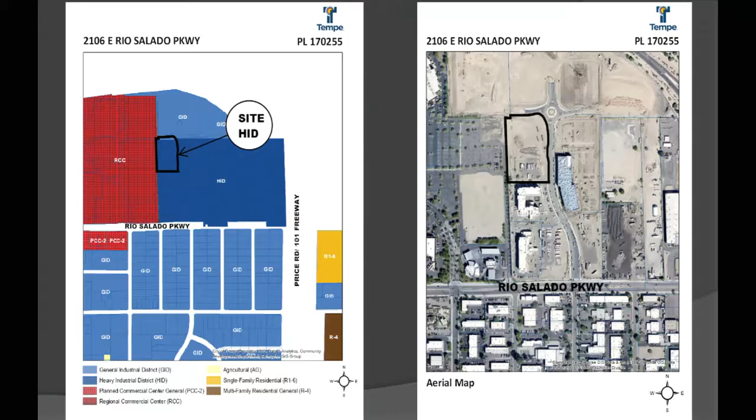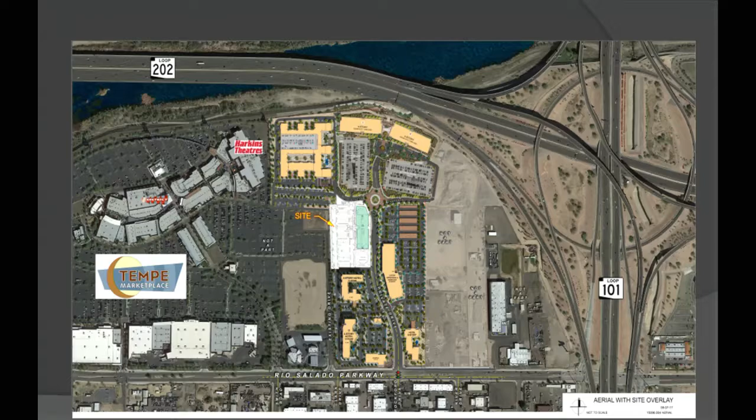They came in previously for the PAD, which established the development standards for the site, and they're before you now for the development plan review for the site plan, landscape plan, and elevations. This phasing plan shows we're on phase 9 of 10, with additional commercial office and a possible hotel or future office. They're not necessarily being done in the order of phasing shown here.

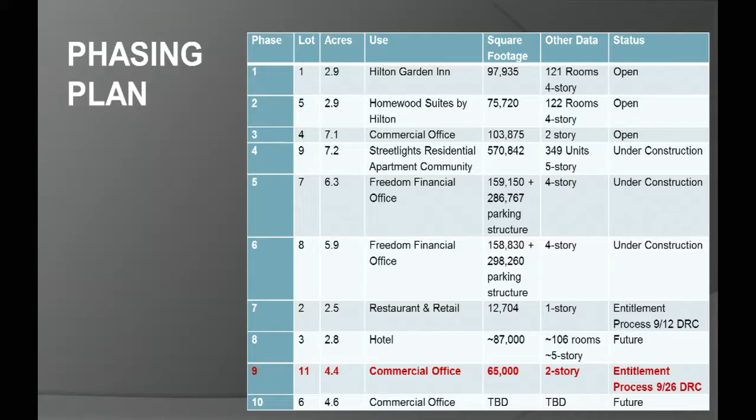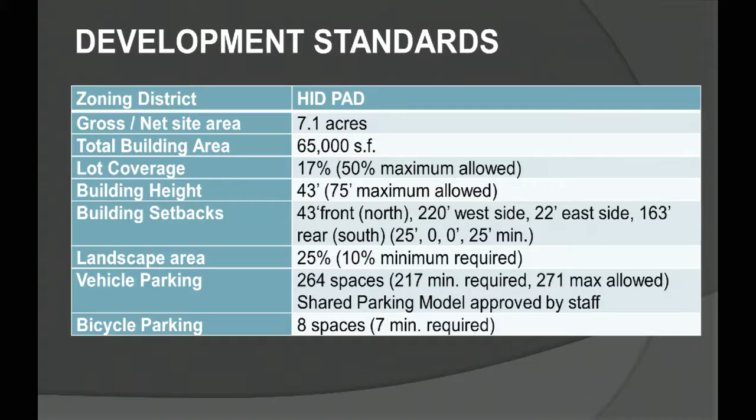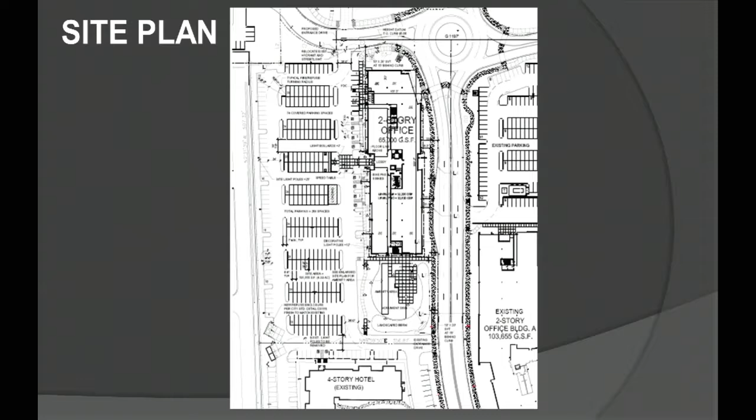These are the development standards they're working within. Their required parking is 217 spaces, so they're slightly over the required parking. It is a surface parked lot. This is the site plan; all of the parking is on the west side of the building. They've provided additional landscaping, and they're doing some covered parking for additional shade for the tenants.

This shows the landscape plan. They have a specific tenant they're working with, and they're doing an amenity area on the south side of the building specific to their tenants' needs—that's the area with the circular pattern and some artificial turf. One of the issues is that because this is on a landfill, they have restrictions on the amount of water-intensive landscaping they can use, so this is a condition where staff is supportive of using artificial turf within the development.

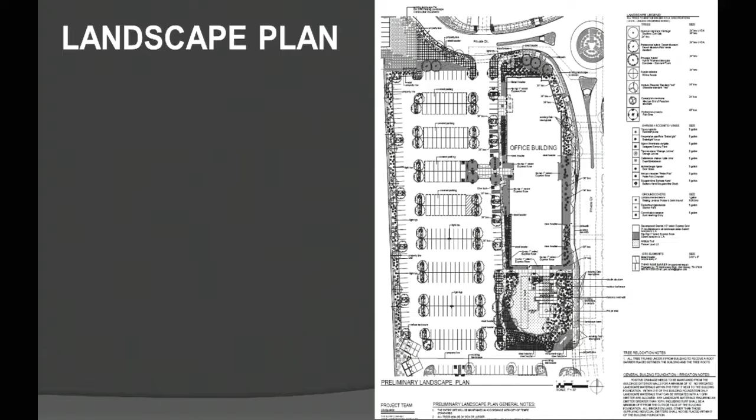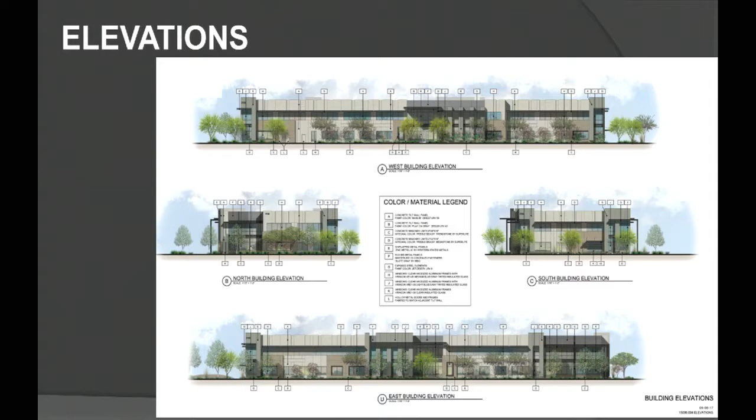It's a two-story office building, and these are the elevations. We've not received any calls of inquiry or concern regarding the project. The applicant has seen the conditions of approval and is in agreement with staff. I'll defer to the applicant to go over the design details with you. Any questions of staff at this time by the Commission? Seeing none, we'll ask the applicant to give a brief presentation.

Thank you, Madam Chair and Commissioners. My name is Todd Lawrence with Butler Design Group. We're the architects for the project, representing Boyer Companies, the developer. Boyer recently completed, within the last year, Building A, directly across the street from this proposed development. Boyer is very excited to have a tenant in line for this, Benchmark Electronics, who are on somewhat of a fast-track schedule to get moved in here and consolidate their offices elsewhere in this city and in Scottsdale.

The building itself is a rather straightforward two-story shell office building. All tenant improvements will be coming at a later date by a different firm. The building is composed of tilt panel concrete construction with a steel frame within, and we have portions of steel and glass along the facades. The palette is primarily based on what was used at Building A across the street, so we have a lot of the same elements, forms, and materials, though we're introducing some new ones to make this building stand out by itself.

The rest of the site, as mentioned, is primarily parking with the amenity area to the south. We'll be utilizing the existing access points that are already established. On the north side, I think we are creating a new one, which will be in line with the Freedom development across the way.

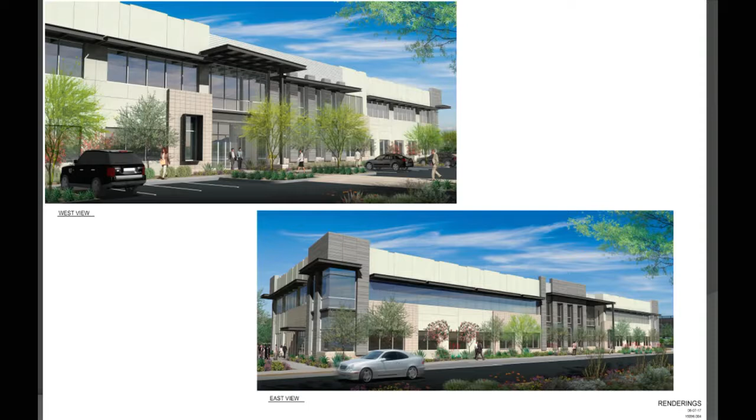Aside from that, the tenant is looking at doing solar car canopies, and the rest of the development is more or less straightforward, meeting with staff, adding landscaping, and trying to increase some of our shading components for the site. Primarily, that's it.

Questions for the applicant? Anyone? Commissioner Brown?

I have just a few general questions. I understand the site was recompacted - this is part of the greater domestic landfill area that had been under remediation for several years. Deep dynamic compaction occurred in these areas, and no further additional compaction is going to occur. They are going to go through the process of scarifying and meeting the geotechnical requirements required by Hogan Associates, who's overseeing all of the development of Tempe, or the Rio 2100.

I have some curiosity issues, but I'll just talk to a soils engineer about how that's typically done. Not having done it myself, I recently attended a seminar on problems with geotechnical work, and I'm sure that with this investment, it's been done properly.

The only other comment I had is that the building plate is pretty wide, so a lot of the interior space is some distance from glass. I just learned that you're not doing the TI, so perhaps there's nothing to be said beyond that, except that it's a challenge.

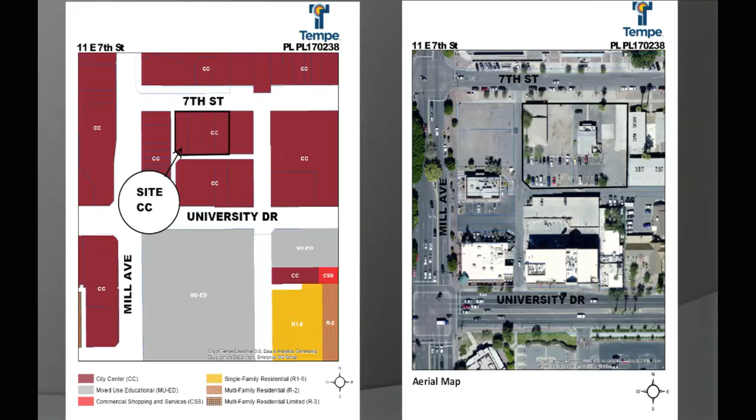They are proposing some modifications to the planned area development standards, including an increase to lot coverage. I need to note that the report said a decrease from 81 to 85%, and a decrease in landscape area on the ground floor, although the original PAD included the upper floors as part of their landscape allotment. We looked at the comparison of just the first floor landscape area.

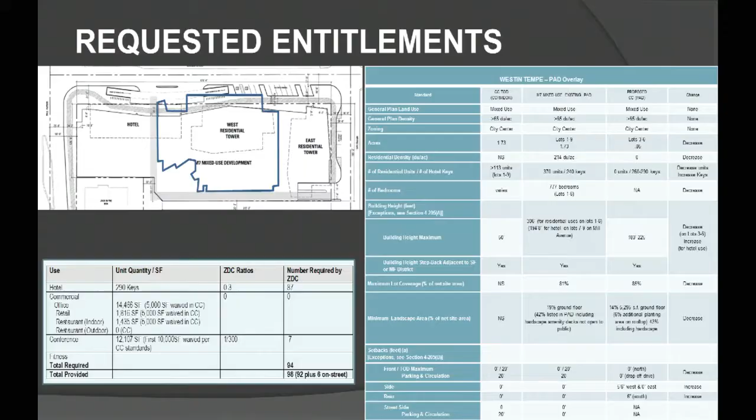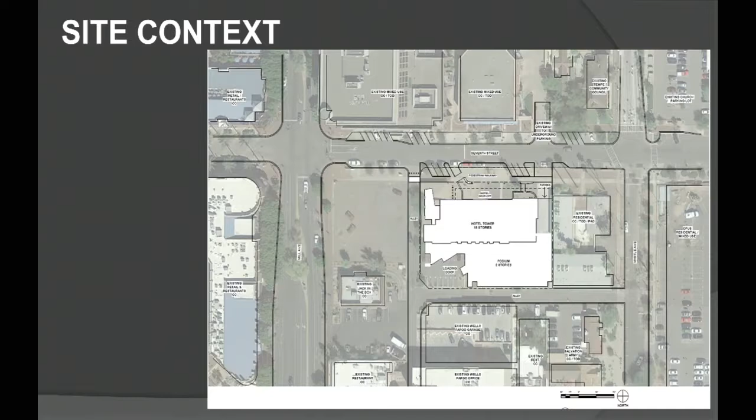This shows you the site context. The hotel has a couple of different layers: the first two floors, and then it steps back to more of a thin tower-like element. You'll see that in some of the site plan or the floor plates.

This is the site plan. All of the service entry comes off of the southwest corner of the property, off of the alleys. They've worked very closely with staff in trying to activate the alleys so they aren't back of house in terms of the aesthetics and the form that they've taken.

All of the entry for guests is off of the north side with additional parking on the street front. The access would be one way in from the western drive, circulating on site to a drop-off lay-by area where they have valet access, and then exiting to go into the garage, which goes below grade.

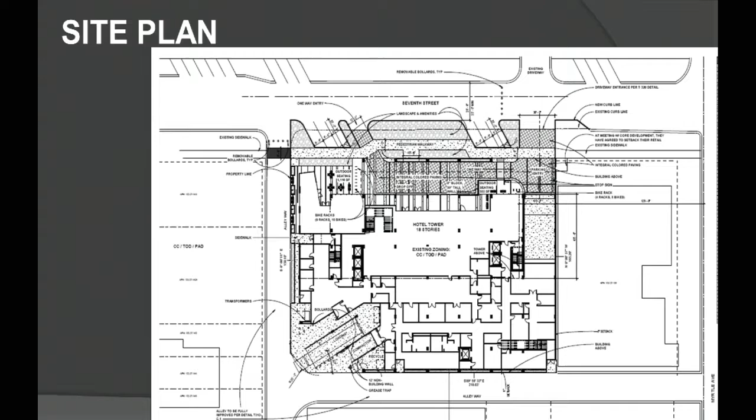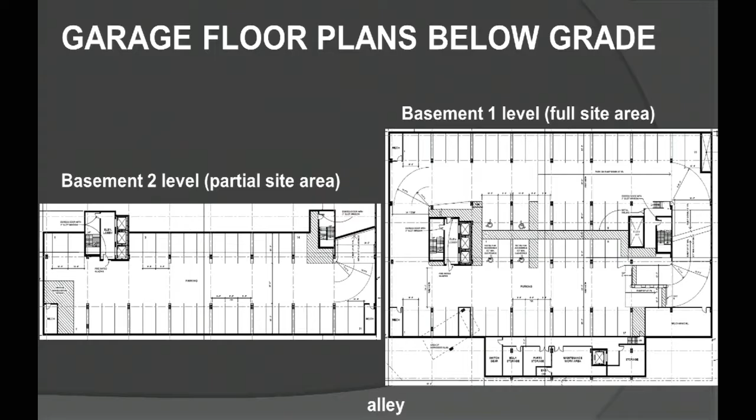The basement level is two floors, subterranean. The lower level is actually a half level that could be expanded if they chose to, but they're meeting the parking requirements for the downtown standards. The first floor is shown there on the right-hand side as the full footprint underneath the building. Here's the first floor again.

I'm not going to go through the programming of each floor—I'll leave that to the applicant—but wanted to show just the relationship of the setbacks. They did push the building back on the west side to enable some additional landscape area on the west, as well as on the south side. It's a 6-foot setback, but the first floor is set back 2 feet to allow planter beds on the first floor that allow some vines to grow up on the south elevation of the building.

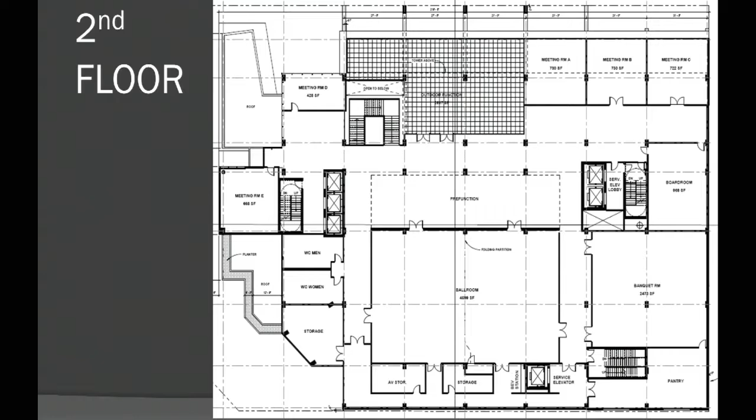They're doing a zero lot line on the east side, and then zero lot line on the north with some arcade fins that extend out over the lay-by area. There's a small rooftop landscape element on the southwestern corner that's viewed from the top, and as you go up the building elevations, you'll see more rooftop expression, and then the building itself becomes a narrow fin to the north orientation of the site.

Floors 4 through 16 are standard rooms, and then the amenity deck is on the 18th floor.

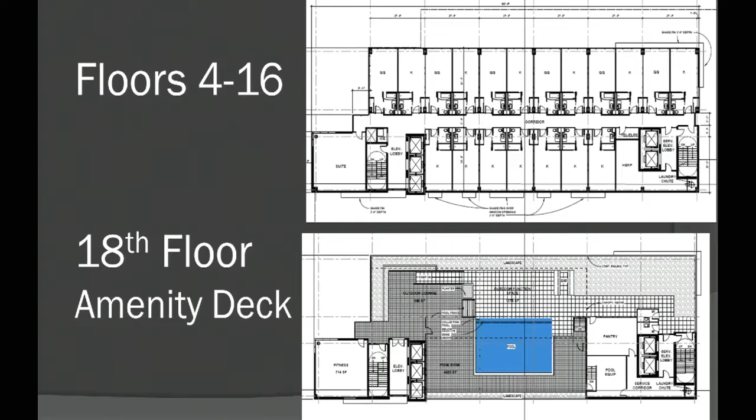The landscape plan is proposing evergreen elm and orchid trees along the street front, and they've got a variety of succulents and vines that would take the heat on the west and south sides to enhance the elevations along the alleys.

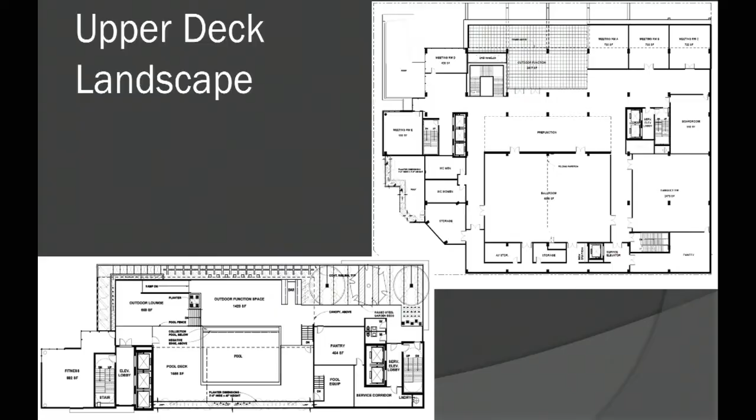These are the upper deck landscape areas, the amenity deck, and the 2nd floor. These are some close-ups of the elevations of the east and west side of the building.

I'll defer to the applicant to present the materials and the design intent.

These are the south and north elevations. The south side has the window configurations aligned with the interior rooms, but you'll notice they're offset, so it's not a standard grid pattern, and it's not a typographical error in the drawings—that is the way they intend them to be. And then they're predominantly doing glazing on the north face.

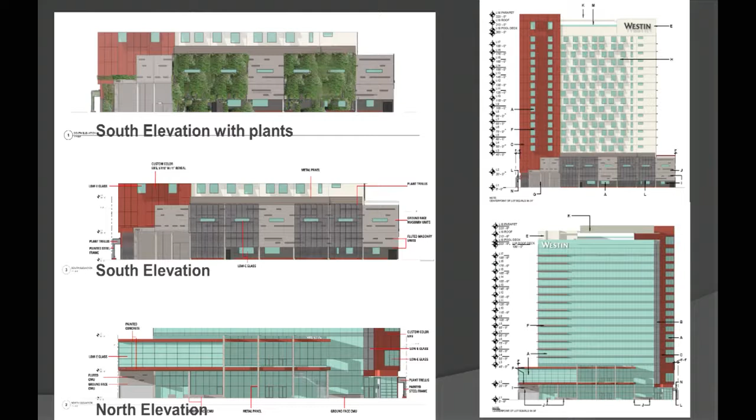Some renderings and 3-dimensional modeling of the site.

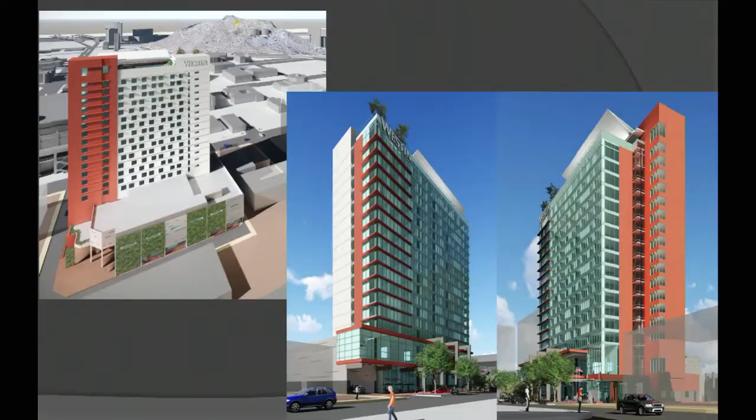I wanted to go over a few conditions of approval that are a little out of the ordinary, and the first one is a proposed change I'd like to read into the record that we discussed at pre-session.

This is in regards to condition 4 for the timing of the demolition permit. This would be changed to read: 'A demolition permit may not be issued for any existing structures on the site until one of the following occurs: 1, a mass excavation permit is issued that includes shoring and excavation of the basement level; or 2, a phased foundation permit is issued; or 3, a complete building permit submittal is accepted by the Community Development Department.'

This has to do with the timing of their phases for construction and the existing structures on site. The other conditions—number 9—is related to the east side driveway configuration as shown on the plan. It contemplates the adjacent property to the east having a setback for their building. Since we don't know if that is going to occur, we wanted to maintain safe egress from this property on site with a sight visibility triangle.

There was a drawing within the report condition that demonstrates how that can be done without affecting the floor plate of their building, providing safe egress to 7th Street from their garage when you're ramping up to a sidewalk condition. So that's what condition 9 is about.

Condition 15 is regarding the materials on the north entry arcade. You'll notice the fins on the lower left side are kind of a copper color. We didn't receive the materials until fairly late in the submittal process, so there was an assumption that this was a metallic finish on the paint for the metal fins. Later they came back and they were presented as more of a beige, nondescript color. So trying to tie in with the character of the downtown and the brick colors and some of the copper colors, staff conditioned that the material on those fins reflect what you see in the image to the left, that it be a copper, not necessarily a copper metal, but a paint that has a reflectivity in it with like a mica pigment.

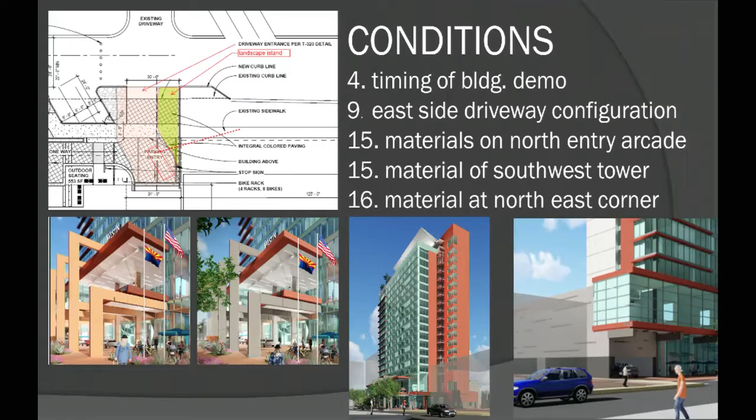Thank you. I want to understand the fins—that is a metal product, but it's being painted a flat paint? Well, yeah, I've got the sample boards here.

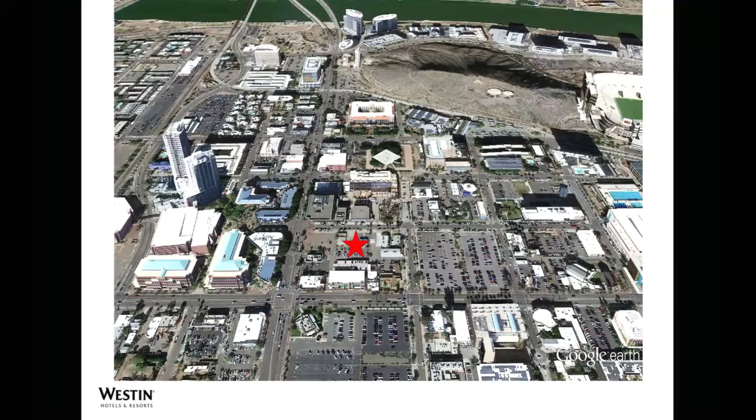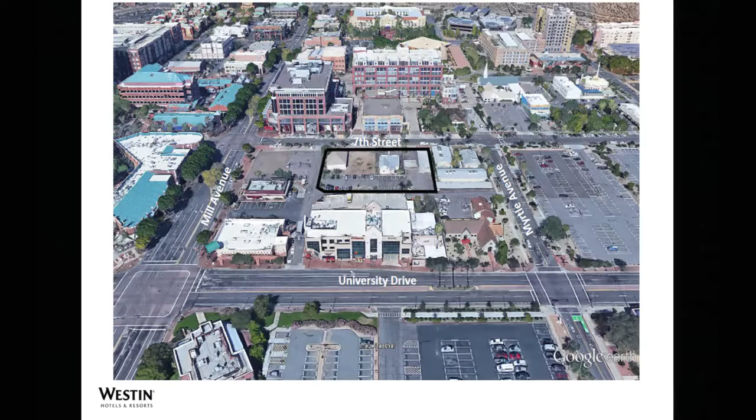A little more close-up context there. This is, in case you're wondering, a site with a basketball court on it—there's a large temporary basketball court there.

Diana does such a great job presenting the basics and main part of the project, so I'll go through quickly. The site is zoned CCPAD, has been that way for quite a while. I think the M7 project was zoned CC.

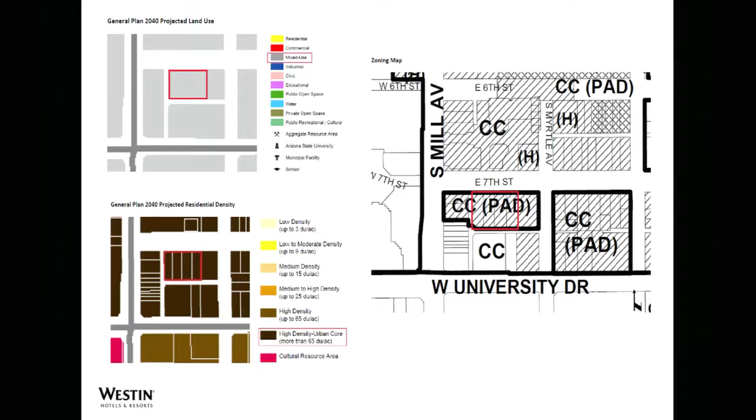It's a mixed-use general plan with high-density urban core density on the property. It's within the urban center concept study for downtown building heights, which allows 300 feet—we're not going anywhere near that. The original approvals for M7 were, I think, 307 feet. Our building's top tip is at 224, and that's not even the deck—those are roof structures, shade structures on the roof. So the actual building height is significantly less than that.

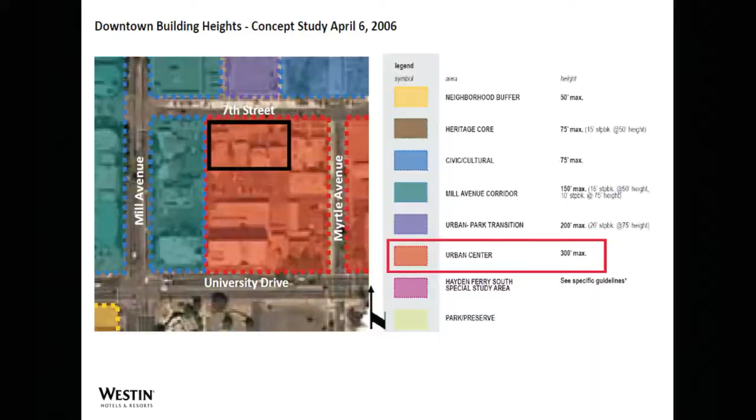I'll let the majority of this presentation be by the person who knows the most, the architect from RSP, Joe Ellis. Hi, I'm Joe Ellis with RSP Architects.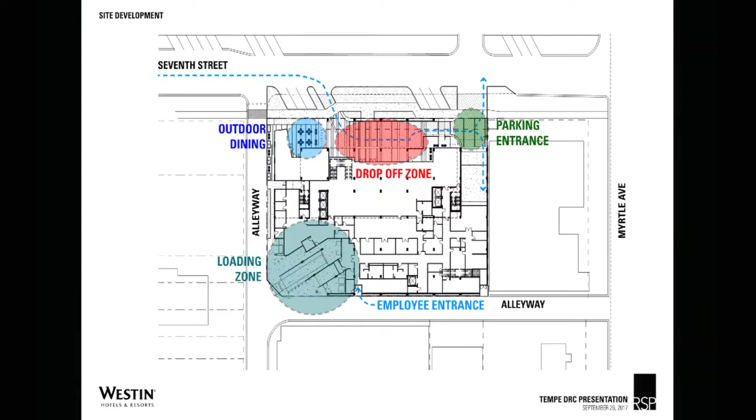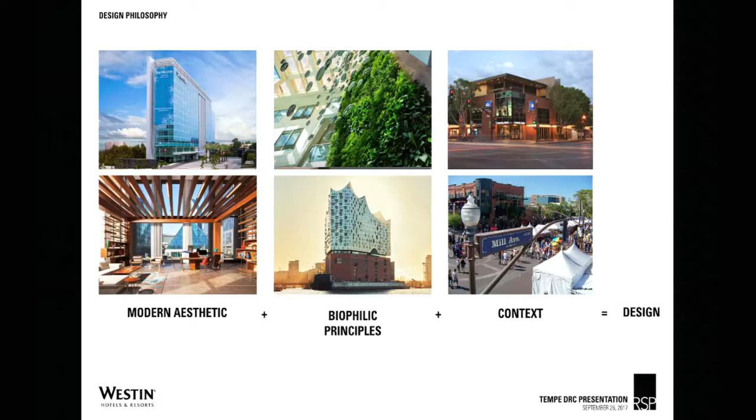As I mentioned before, this is directly out of Westin's design foundation book, as they put it. The way they see the design of a hotel coming together is to take what they feel is a contemporary and modern aesthetic, form that with biophilic principles tied to nature. One of their requirements is that on the interior of every Westin hotel there will be a green wall. They also encourage patterns tied back to nature, and then take the context from which the hotel sits and meld that together—that's their recipe for design.

Given that, there are a couple of things we tried to achieve in the design, and I think we did. The building is composed of a two-story podium at 45 feet, a first floor of 20 feet, a second floor of 25 feet, and then a tower.

We've taken the tower and broken the mass down into three interlocking components. In this rendering, what you're seeing is what we feel is a more distinctive signature aspect of Westin, with this glass curtain wall as their front door, if you will, from 7th Street, and then an interlocking component of the tower—the reddish color piece that ties back to the coloration of brick masonry—which faces Mill Avenue.

You also see at the top of the tower a fabric stretched on a steel frame canvas awning that provides shade to an outdoor function space and pool at the top of the building.

The tower is broken down in scale and notched on this east side, and that was purposely done to try to open it up and make it as inviting from the corner of 7th and Mill as possible.

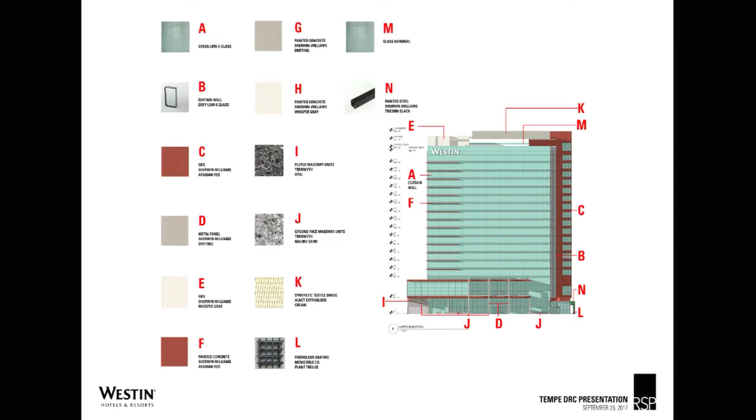On the south side, here you're starting to see these panels on the lower side of the podium that would be used for these green walls, and that is a molded fiberglass panel that has open squares of about 1.5 inches, applied in front of the concrete block material.

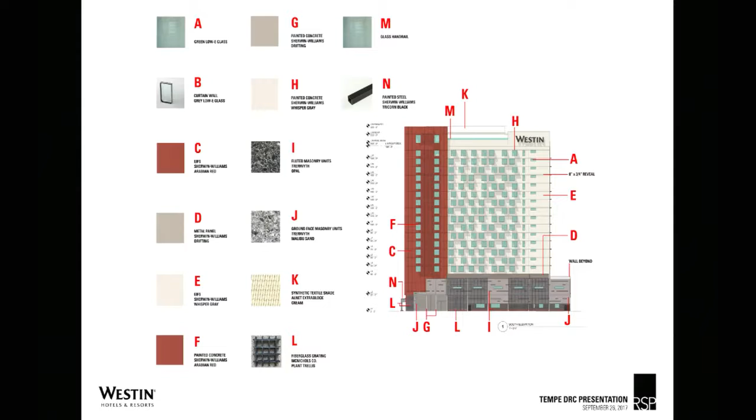This is a shot very quickly of Capture's fabricating plant. These are panels currently being made for the high-rise Hampton Inn that's going to be in downtown Phoenix. Sun Construction very successfully put a series of panels on the Ak-Chin Hotel down in Maricopa. They're just finishing that project up. So it does bring a higher level of quality to the EIFS product.

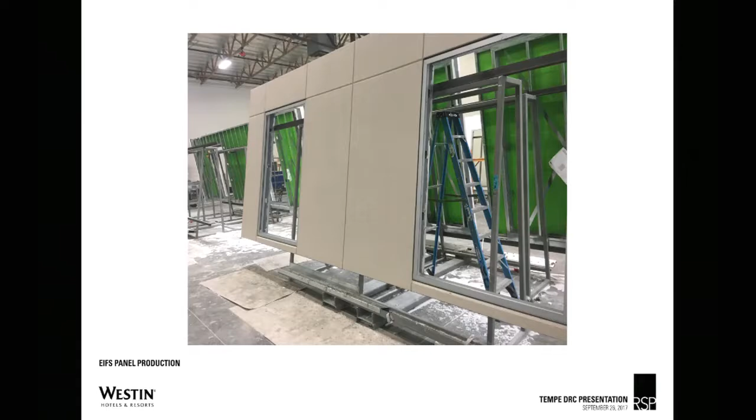Two landscape plans, just quickly to show you. Our landscape architect is here if there's any questions. We worked diligently with staff to develop this right-of-way area, incorporating the diagonal parking that would match the Opus project, incorporating a lush landscape, and bringing a sidewalk that starts to undulate so that you have a lush green planting on one side, and then you shift when you go across the driveway to the other side, and then back again.

We're looking at a pattern on the driveway, again, to pull some patterns of nature back into the project. That would be some sort of a striped pattern, if you will, that would undulate back and forth in a width.

Well, let me go back, because what you're seeing is two different things at the same time here on this drawing. You're also seeing the very top level, which is our pool deck and amenities level. The pool that you see in the center would be raised 4 feet above the deck area in front of it so that you'd be able to be in the pool and look out to the views. When you come off of the elevators, there'll be a small lounge area to the left, and there's a function space up there, and there will be a bar up there with some limited services.

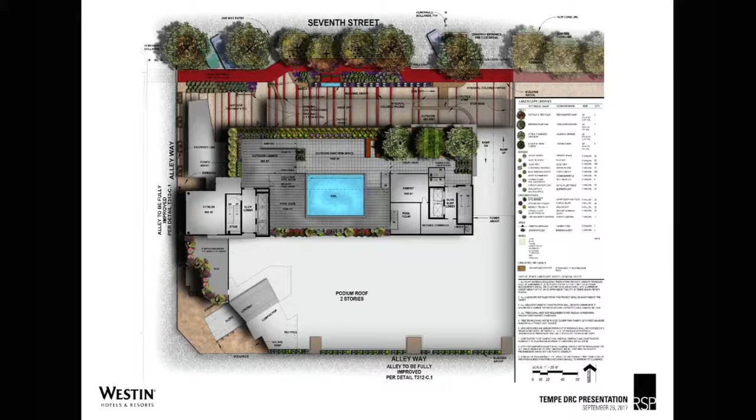Commissioners, Mr. Chairman, members of the commission, I just wanted to mention with Diana's stipulation modification comments earlier, we agree with stipulation number 4. It's just a timing issue. Like she mentioned in the pre-session, you can't actually start constructing without tearing the buildings down. So we talked to Joe at RSP about how you time and how you phase permits. That's kind of the best option for us at this point, so we don't have to dig around the buildings. The other stipulations we are fine with because they're really talking about coordinating with the project next door.

The only one we still have an issue with is what Joe was just talking to you about, the EIFS. We feel that the ground floor is where a lot of the pedestrian feeling is on these materials. We tried to make that as rich as possible. We tried to really activate those alleys, make them something you actually want to walk down and not just a back alley anymore.

So we did as much of that as we possibly could. Above two stories, the two-story podium, I don't think the public or people walking by, or even people from other buildings or Mill Avenue, will notice if this is something else or if it's EIFS. I think putting something like brick would be a little bit overkill on a facade this large on Mill Avenue.

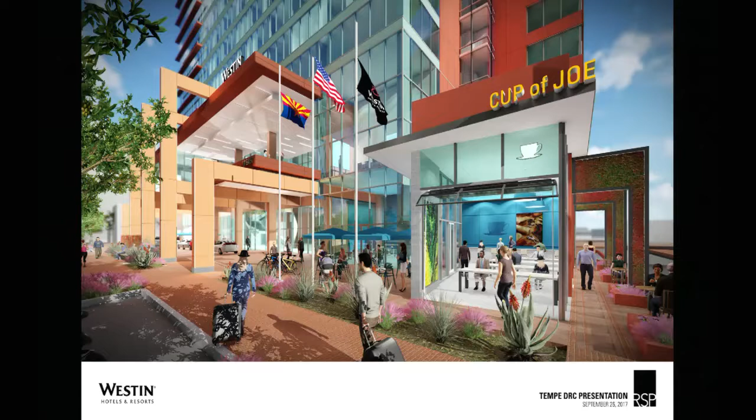On the Opus project, that was a big push we made to make sure 7th Street was very lush and green, matching the House of Tricks across the street with a lot of landscaping. We mimicked that landscaping on this site, and we believe staff will have anyone else on 7th Street do the same. That was a big deal, and you're seeing it here on the screen. That landscaping ensures people have a place to walk, with shade, trees, and seating areas. We've even shown the coffee shop having an in-and-out kind of feel. There are a lot of little aspects to this project I can't even imagine we'll get to tonight, but a lot of details went into it.

So we do feel the EIFS is appropriate on this building. The colors and materials are all Westin approved - that's another consideration. They have a very significant design booklet, 400 pages, which we had to comply with and abide by, and we ultimately had to get their approvals too on the design. So we feel it's appropriate, environmentally friendly, makes sense, and is visually appropriate for this area.

Can I ask a question? You keep talking about the Westin brand. Unfortunately we've seen projects come forward and not get built - what's to guarantee this will be a Westin hotel and not a different brand? Our client already has a franchise agreement.

That franchise agreement is a pretty substantial financial commitment for them to make. We've already submitted conceptual and schematic designs to Marriott and gotten approval on those, so we're very much involved with the brand on a day-to-day basis. The franchise agreement actually requires that they be under construction by January 5th, 2018, and that the hotel open in June 2019. So our client has a heavy financial commitment they'd lose if they backed out - there are financial penalties if they don't move forward with this brand.

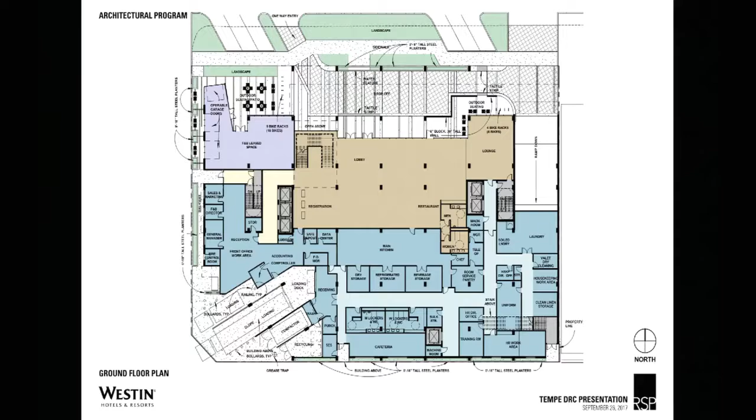We're certainly willing to work on a color that would be compatible to all. It wasn't a huge difference between the two, so I think some of us might prefer the second color. The gold is kind of... well, we kind of felt there started to be a little too much of the reddish, too much glitz maybe. Anyway, I just wanted to touch on that.

Also, our question about the EIFS - you showed a shot of the panels being made and craned up. What kind of sealant is used, and does it need to be maintained every 5 or 10 years? Yes, absolutely. Essentially what you have is a full bay - our bay is 27 feet center line to center line, so you'd be hoisting a full bay and full height. There's a half-inch gasket that goes between the two panels. When that's lifted in place, it's set down on the gasket, and then there's a caulk joint - backing, and then a caulk joint on top of that.

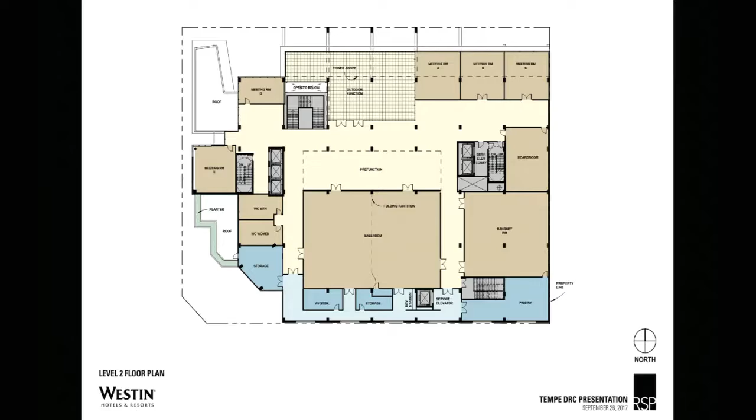The alternative may have been to pull that back onto a roof space on the south side of the building, but we didn't think that would in any way be as pleasant a space to have functions, and also it wouldn't activate 7th Street. So you also have mechanical equipment.

So what you're talking about is—I don't have a roof plan—but you're talking about the roof space on top of that ballroom. It would be very hard to load that with planting and materials that would have a heavy load, because it is a long span, about an 80-foot span on top of that ballroom.

And the remaining spaces have a lot of mechanical equipment up there, so it kind of restricts the opportunities on that south side. Solar panels, yes—we have talked to the client about the possibility of providing some sort of solar panel that would tie into a loop system and maybe even heat the pool on top with solar panels.

Okay, thank you. I just think as Tempe, especially downtown, becomes a more vertical city, we need to think more about what our roofs look like, because people are looking down onto them. Yeah.